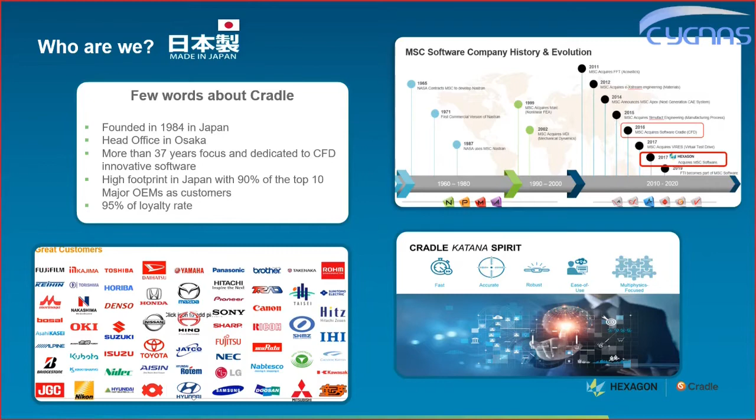So the good point regarding the Cradle spirit is the katana. This means that we are fast, accurate, robust, easy to use, and also multi-physics focused.

So why should you consider Cradle? As I said, our spirit is about the katana, a pragmatic tool that can be used by a customer. That's why we have a good user-friendly interface just to handle efficiently any kind of simulations. And this is not just about user-friendly, but also about handling complex, real geometry.

That's why we made a lot of focus on meshing. We can handle, let's say, 30,000 parts, and we can mesh it really quickly.

In combination with the solver's capability in terms of accuracy and speed, we can combine complex things such as motion using overset techniques, multi-phase up to DEM, and they will show you some examples in terms of multi-phase capability in combination with thermal. Especially for thermal, when we talk about a lot of parts, we need a robust and fast meshing for that. Because of all these multi-physics capabilities, including co-simulations, we try to collaborate closely with our customers.

That's why we have this very high satisfaction rate, 95%. So that's why we are proud of this number.

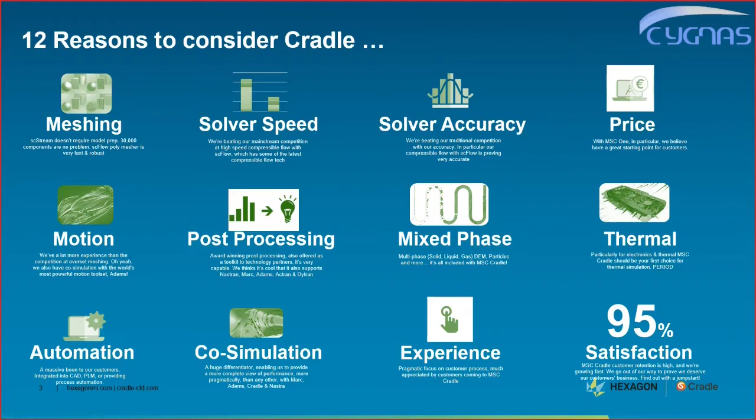Regarding CFD, for me, CFD is everywhere, and I discover new areas every time. That's why we have different application areas. For sure, in aerospace and defense, when we talk about turbo machinery, transonic, supersonic, or even subsonic, we are also developing hypersonic capability, which will come very soon.

Chemical process, marine, and oil and gas, especially efficiency in marine applications. This can be on the propeller, taking into account the flow around the hulls, considering propeller motions, cavitation, and erosion. This can be really complex physics.

Even in a maybe simpler way, but not so easy, consumer goods, considering things like clothes using DEM simulation, rotation of systems, and even free surface analysis.

Electronics, a lot of applications, considering very large assemblies of different parts, and we have some dedicated tools to extract information - not just showing it's hot or cold, but why we got this result. In terms of design, extracting the right information is always important.

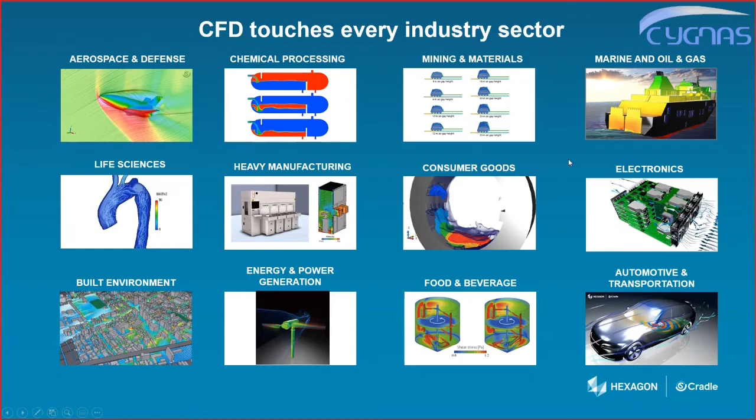So I can talk a lot more, but let's move on to some specific areas.

If we take the example of energy, let's say in terms of extreme weather conditions, especially for floating structures, we need to consider especially the wind loading on structure. This can generate waves, and in addition, some resonance effects.

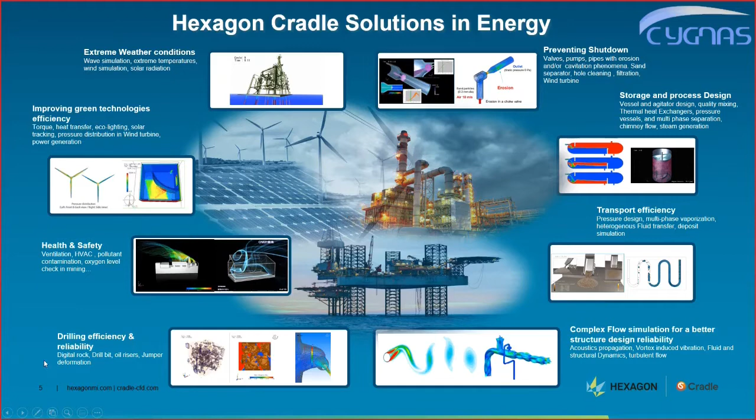So we'll discuss a little bit more on crane applications. We can discuss green technology efficiency, let's say on wind turbines, or considering different effects, especially the thermal side, solar radiation, or thermal radiation in addition, or even storage and process design, or transport efficiency through piping, or granular flow using DEM, and maybe more, such as drilling efficiency through the system.

So let's have a deeper look at some real examples. You're halfway through. Yeah, perfect.

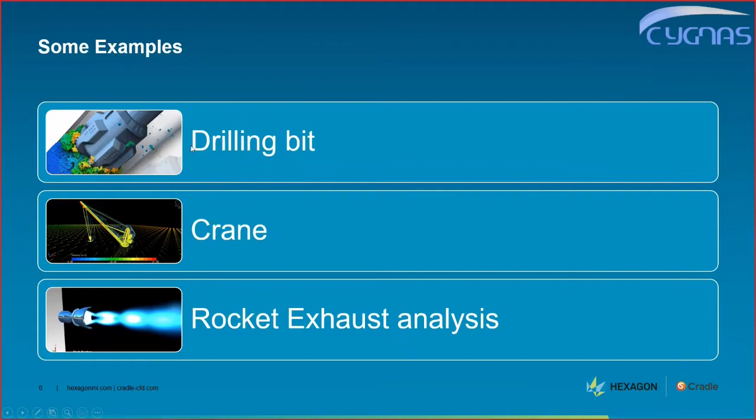So let's take a deeper look at the drilling bit application, crane, and rocket exhaust analysis.

For the drilling, as you can see in the picture, some of you may know this well. Even the motion of the drilling part, as you can see in the videos, can be really complicated to extract, especially because it involves very high non-linearity.

But on the CFD side, instead of only the structure, we can be involved in such simulations, such as estimating the drag force acting on the drilling bit, handling the complex motions, or even the particle generation due to the motion of the system.

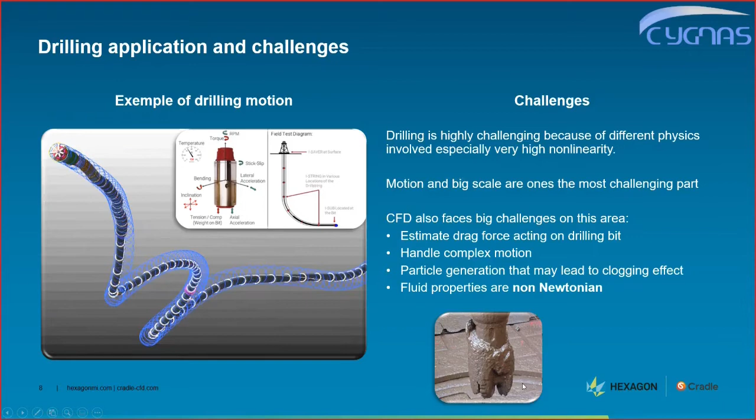So really complex. For that, we were able to define the combination of translation and rotation at the same time, including the fluid inside, which is a non-Newtonian flow using the Carreau-Yasuda law, where we also include the discrete element method with a cohesion process just to create this effect.

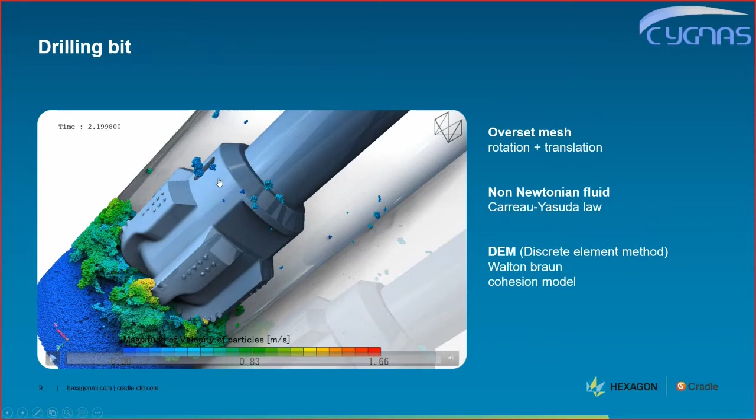Moving on to the crane under wind loading, most cranes would like to support specific things, such as very high load systems. But the wind loading, especially in extreme weather conditions, can generate a very high load due to the pressure force acting on the structure.

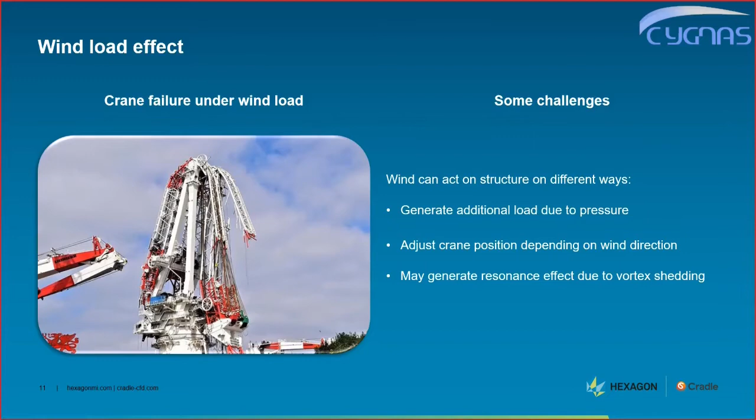It can also adjust the crane position depending on the wind, and maybe generate some resonance due to vortex shedding. As an example, let's look at two simple samples.

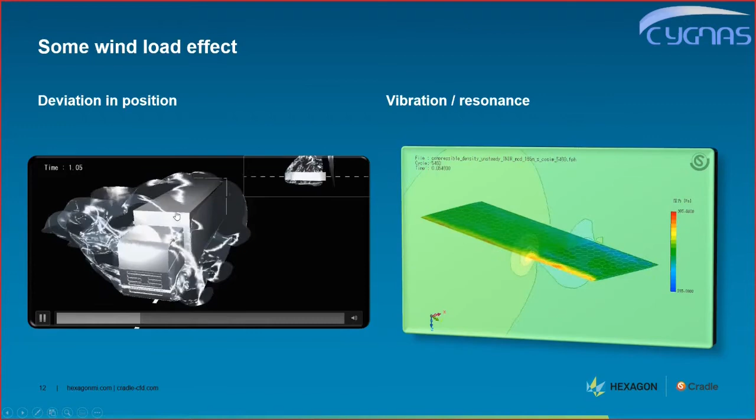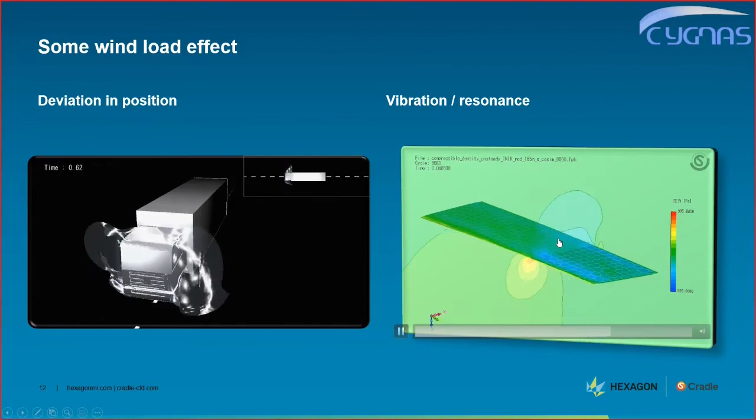Let's say a truck moves on with sudden crosswind - you can see directly the effect of the pressure across the truck's motion. And because of the vortex shedding, or pressure fluctuation acting on the wings, this needs to be taken into account in the system.

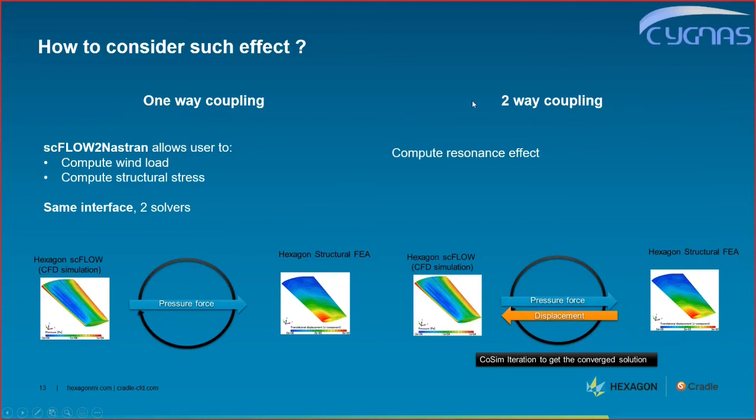For both of these, we need to exchange information between the CFD solver and the structural side, or even multi-body dynamics. That's why we have scFLOW2Nastran to smoothly exchange information from the fluid session to the structural session, or even co-simulations with two-way coupling to exchange the effect at each time step.

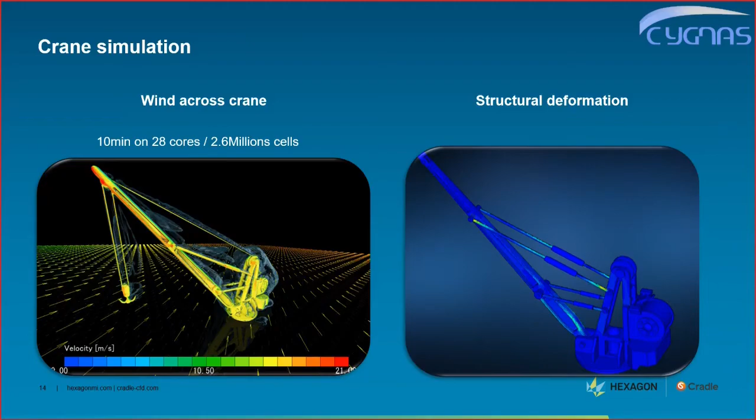Another interesting application is the rocket exhaust analysis. Especially when we talk about highly compressible fluids, we need to handle different specific points. One is to be able to numerically get a stable calculation.

That's why you have different Riemann solvers, as you can see, that can adjust the stability and accuracy depending on your simulation. But the default one is typically an automatic way to balance adding stability where it is needed, regarding the precision when it is needed.

And because this is not sufficient, we also add some acceleration without any compromise on the accuracy. By activating Jacobian-free Newton-Krylov acceleration, we are able to speed up by 2 times faster on average.

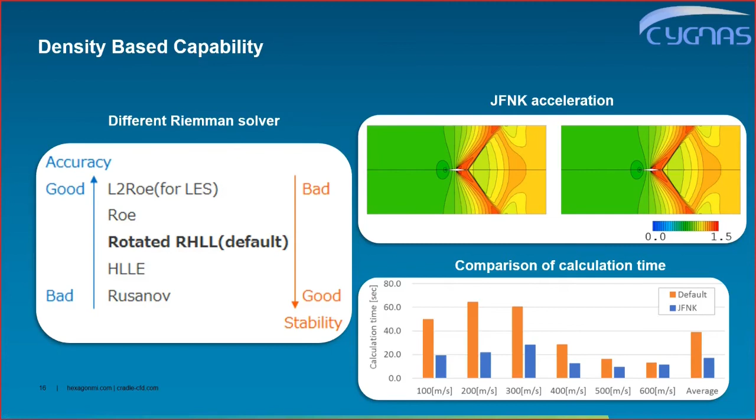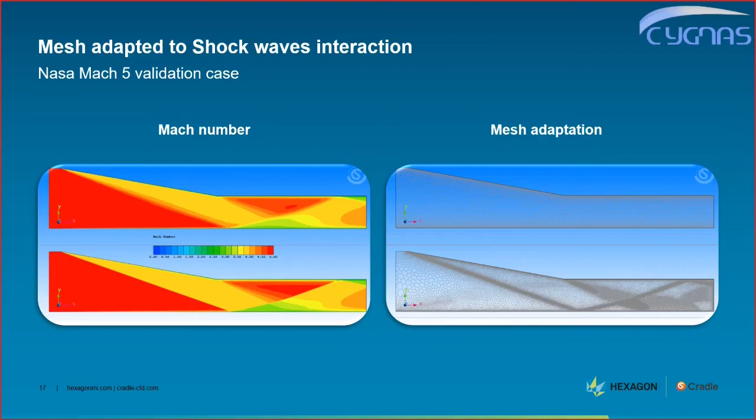And because shock waves are not easy to capture, we can link this density-based capability with mesh adaptation to accurately capture the flow structure and the shock waves that can interact, such as with the boundary layer.

As an example, if I take this rocket analysis with a certain amount of pressure on the inlet, we use a 3-step adaptation where the final mesh is 0.5 million elements, and only two hours is necessary to compute the whole system and capture the shockwave, as you can see in these pictures.